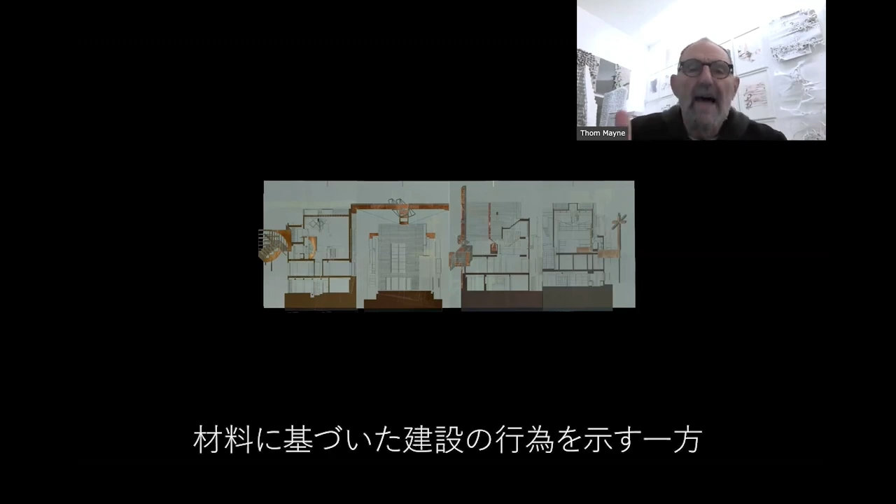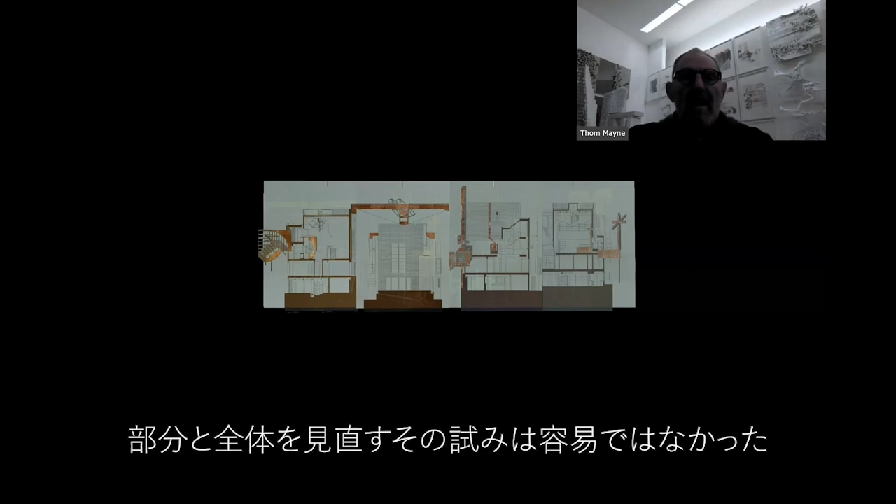They were searching for conceptual organizational ideas, connected to different notions of making, construction, material, etc., in different cases. With the six-foot drawings, you could say it was as much about the constructional act and alluding to material as it was about rethinking organizational ideas, which were challenging the whole notion of part-whole.

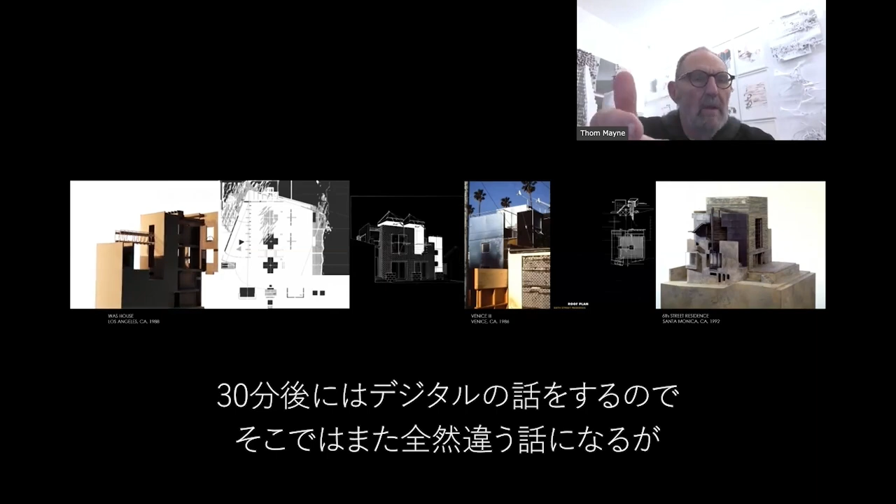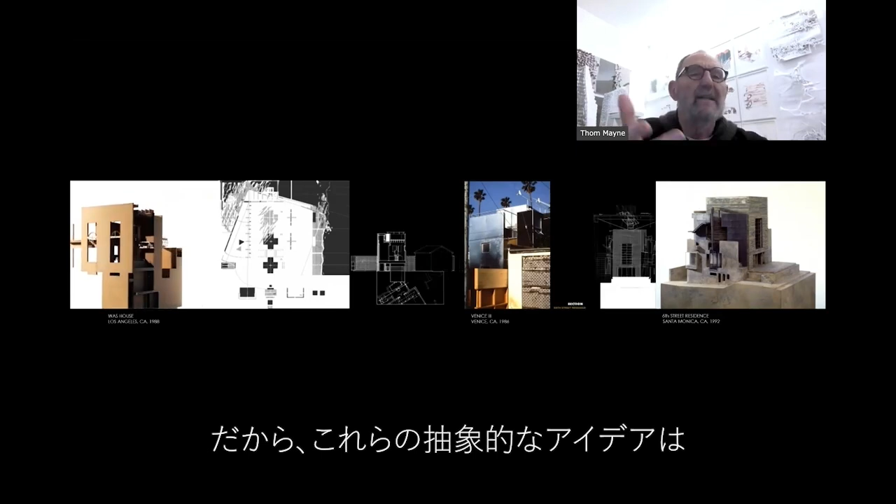These drawings immediately led to conceptual thinking, because in half an hour, when we talk about the digital, it's going to be a completely different conversation. They were done within the tradition of plan and section, so you are responsible for the connection of these abstract ideas—something that has to do with a vertical idea, and something to do with a horizontal plan. And of course, there was still the notion of plan as a generator, the drawings themselves as the generation of both the ideas and the documentation of something you're about to construct.

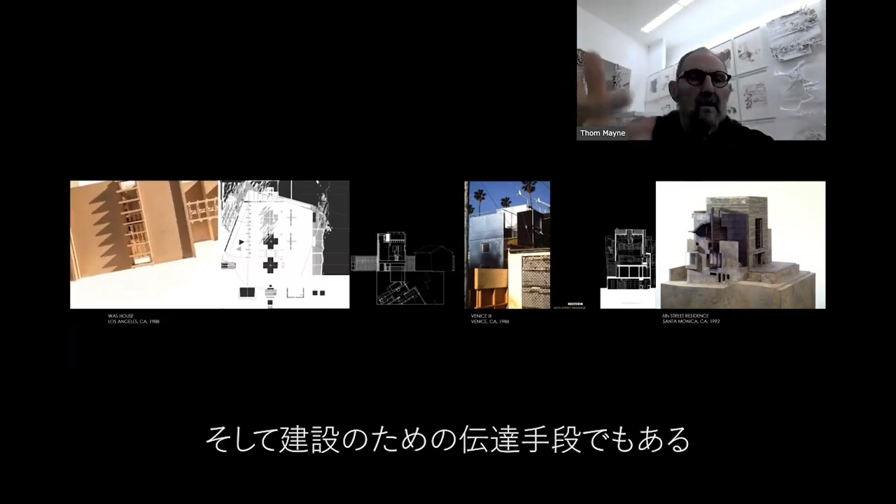Then I put this one little piece in here, the second drawing to the right, the computer showing up. This must be about 1990, and we're looking at a Mac 1, and I'm still looking for the human character within the computer and the eccentricity you can still find, because it was a bit too purely rigid, mathematically and geometrically, for the interest it was having.

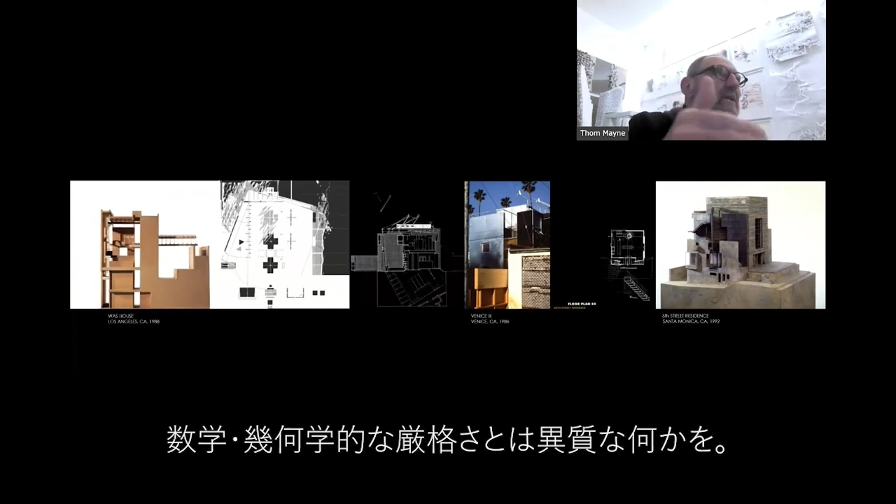Again, this is going to connect to your interests. Everything you're going to look at has to do with a series of fragments and partial elements that are making up a new construct of whole, because I'm interested in relationships, etc., and it's now finding its resolve in the work.

With this, we're looking at the conversation between the drawing as part of a thinking process and the work—there's this reciprocity back and forth. So the drawing is now affecting the building, the construction of the building is now affecting the nature of how you draw and how you use the drawings. There's going to be this continued interest in drawings that are now part model, part drawing—a conversation between the physical thing, the drawing, and its physical manifestation in an abstract sense.

It's going to get more and more rigorous. You're going to look at sections, and as we get to the digital world, it's going to be another notion—we're producing a couple dozen sections of a building, and we're extremely rigorous about the importance of the drawing as it develops into a complex, multi-dimensional kind of thing.

And again, the computer is going to start creeping in, and we're producing as the work gets larger in scale.

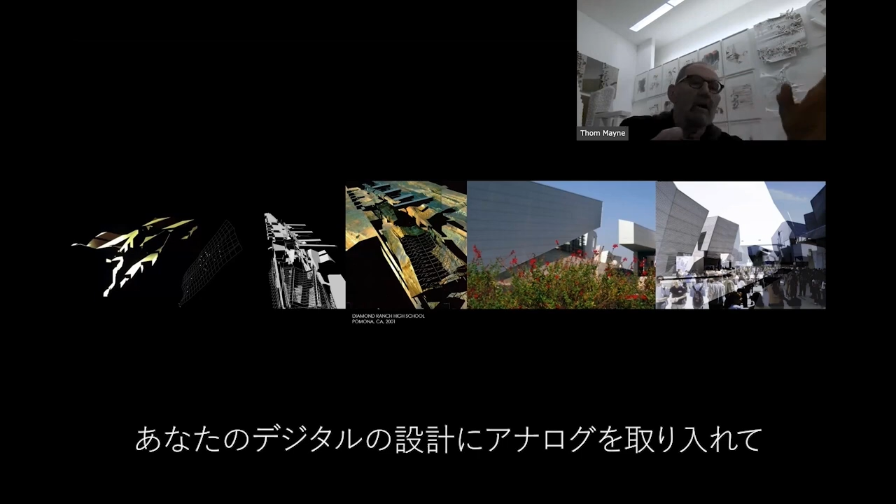That started with this classical method, so if this is useful to you, you're going to be looking also at the possibility of using analog, of looking at traditional methods as you look at your own work. It's going to be much more hybridized in terms of how you approach the work. Because what this is doing also is it forms you as you make drawings—you have to contain in your brain the synthesis that you put this thing together by connecting these abstract drawings of plan and section. It's a very, very different way of conceiving something.

Again, there's going to be this period in between where we're still drawing in conventional terms, and we're now starting to put these things together three-dimensionally with the advancement of complexity that the digital world brings. We're still drawing conventionally, making conventional sections, but they're actually produced digitally. And we haven't quite yet figured out how to make those—I'm going to talk about in a minute.

And the notion of interconnection of multiple systems that produce a piece of work—if you look at the complete left, we're now able to articulate multiple systems and start overlaying those, and now testing it through construction that takes back to the idea of how we're developing this.

What's happening with the digital world is we're able to move in a quicker way, and we're able to now connect multiple systems. We have a system that has an ability to operate in geometric, mathematical terms that allows us to produce something much more complex in terms of the relational aspect of the work. And then there's going to be a moment when there's a leap made, producing a piece of work for a competition, starting from a digital place.

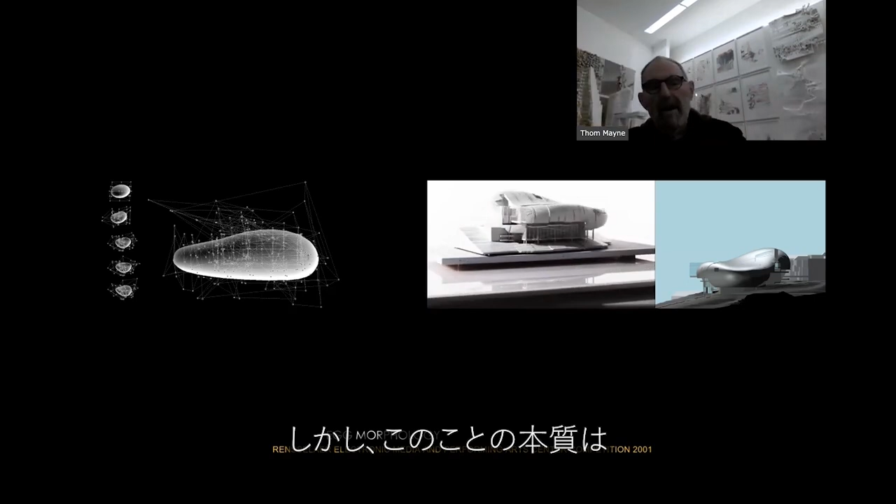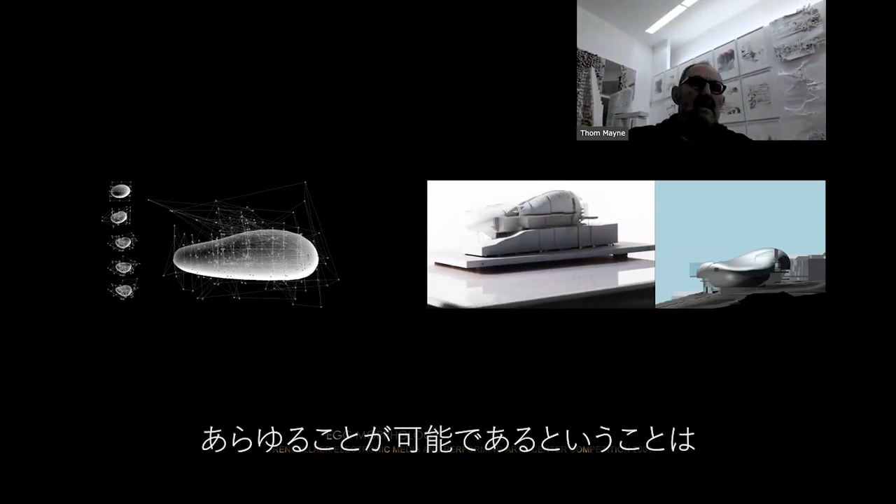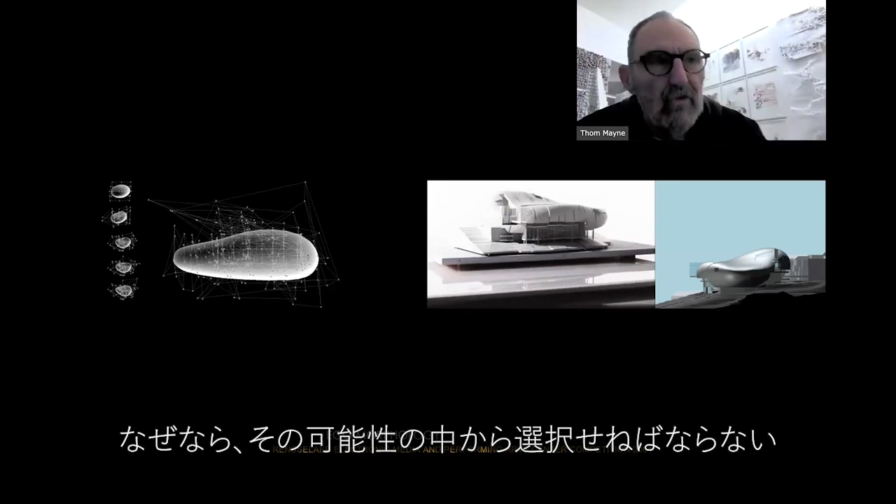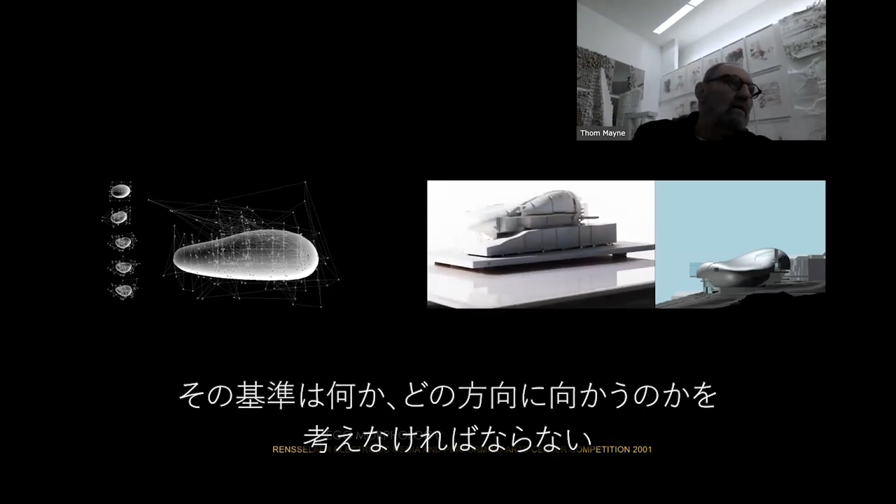But what it really did, and in my essence at this point in my life, I'm going to say it's both an opportunity and a problem. It opened up the possibility of form mapping that was more or less infinite. And that same notion of all things being possible in any artistic activity is also a problem, because now one has to make decisions about the nature of the meaning of that kind of gesture, and what the rules are that allow you to move in one direction or another.

And then there's going to be a kind of shift here, because I'm going to move into another territory, because there's going to be now a connection of construction and conceiving, and the thinking of a thing in conceptual terms, and its realization.

And we were doing this one little simple house, and we were not interested in the conventional drawing process. We put it together in terms of parts and a method of putting those parts together. And it ended up being a precursor to something absolutely essential, as this other world appears in front of us, and we're drawing by hand, of course, right?

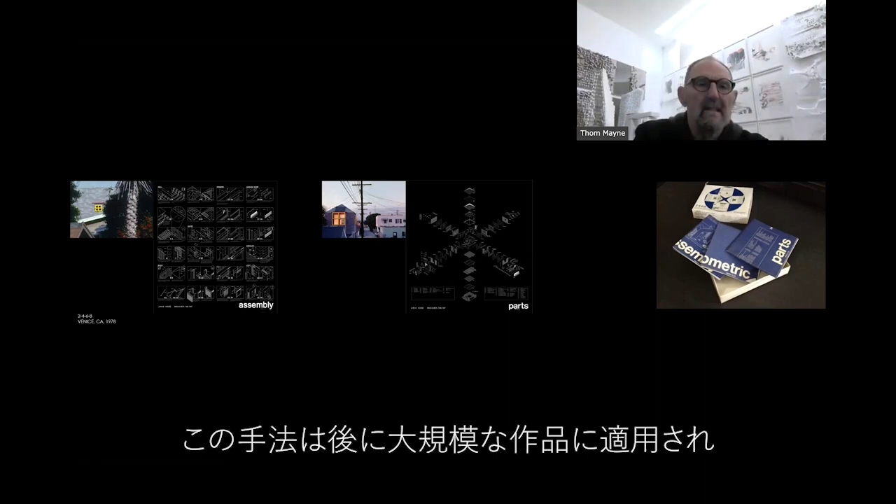And so again, these projects are getting larger, and now the drawing process, the documentation of this thing we're inventing, the digital is becoming more and more important. And again, it's collapsing the traditional notion of plan, section, elevation to make something complex, that's harder and harder to even understand within two-dimensional kind of thinking. And it requires the tools we work with to advance, to be compatible and in alignment with the types of projects we're doing.

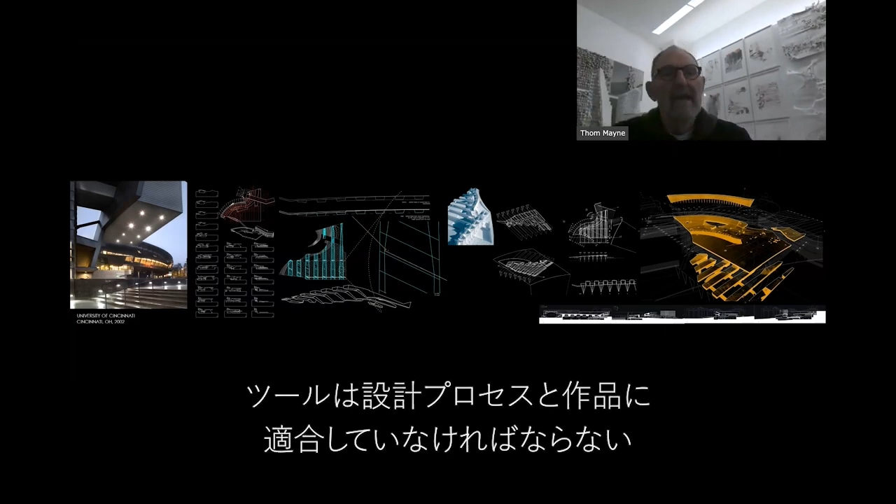And we're realizing we need to advance the technology of the discipline that allows us to advance the thinking and complexity of the tasks that are in front of us.

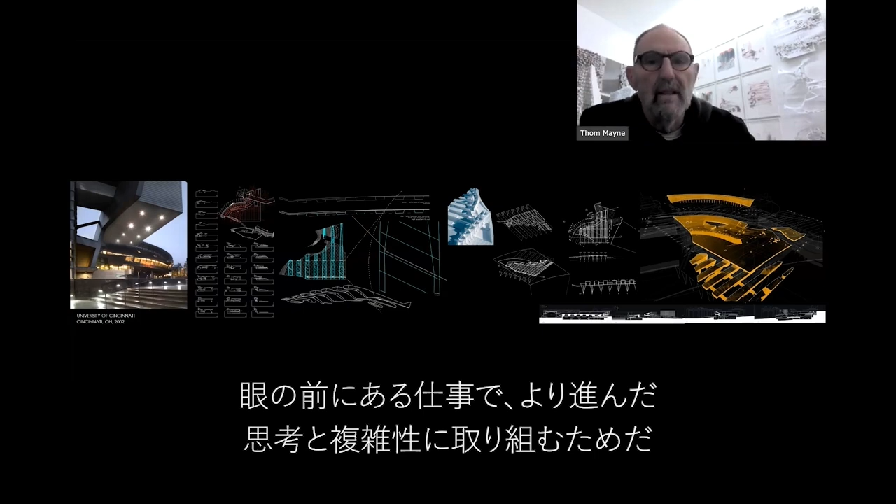And this now is going to become an absolute part of the studio. And what's going to take place is there's going to be a seamless connection, a continued flow of information and thinking from conception through construction. So this notion of designing is going to be very fluid as we move it into its translation, the articulation of materials and the shaping of materials and how they go together to produce a piece of work.

So Tori, I think I think this is you, am I correct?

Correct. Yeah. And I would think what's most interesting for young architects, it's now giving you incredibly extensive responsibilities of realizing your ideas and being able to look at multiple alternatives, and to really extend the whole notion of what you're doing as an architect.

So we're working at a particular facade, and the facade is about performance, for one thing. It removes heat from the building, and it operates environmentally in terms of making a responsible building in those terms. It's now understanding facade as surface, and that surface now opens up huge opportunities.

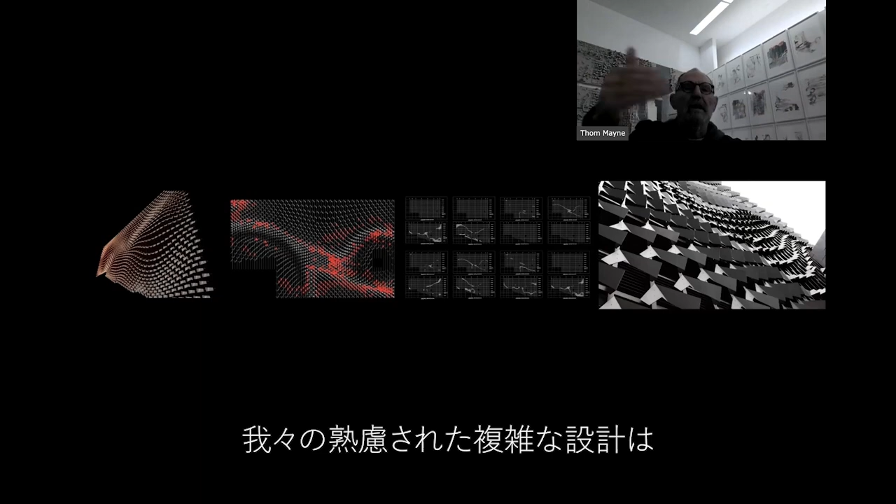And again, you might explain there, this could be a whole lecture, that we can now take a raw piece of aluminum and actually show you how to cut it to get 100% of the material and not throw anything away. And we did that for the contractor. We're now involved in a level of intelligence that goes beyond the constructional ability within a particular culture, and we're very much engaged with them, showing them how to do something in a more sophisticated way that gets us this, right?

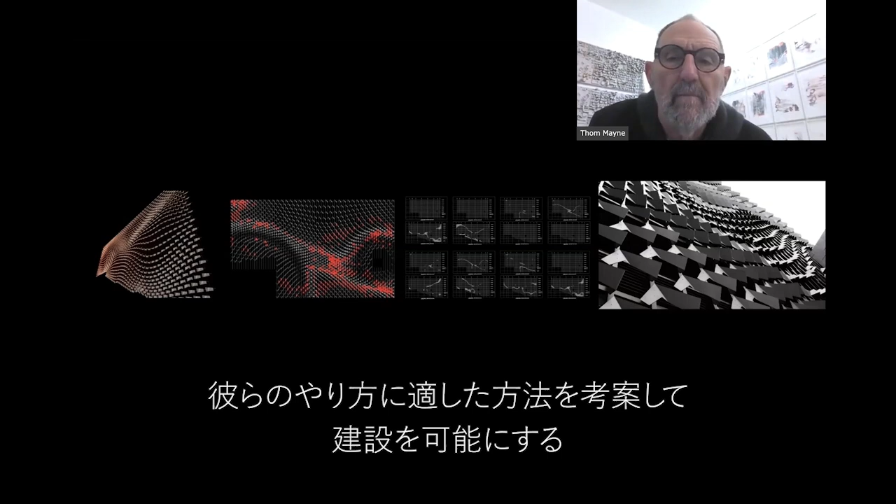I would think this is going to continue in architecture, expanding the role of the architect as we get more engaged in the intelligence of making things, and as we understand how it connects to our original design idea through construction, and with construction comes the method of delivery. It's a dynamic process of how this thing is made.

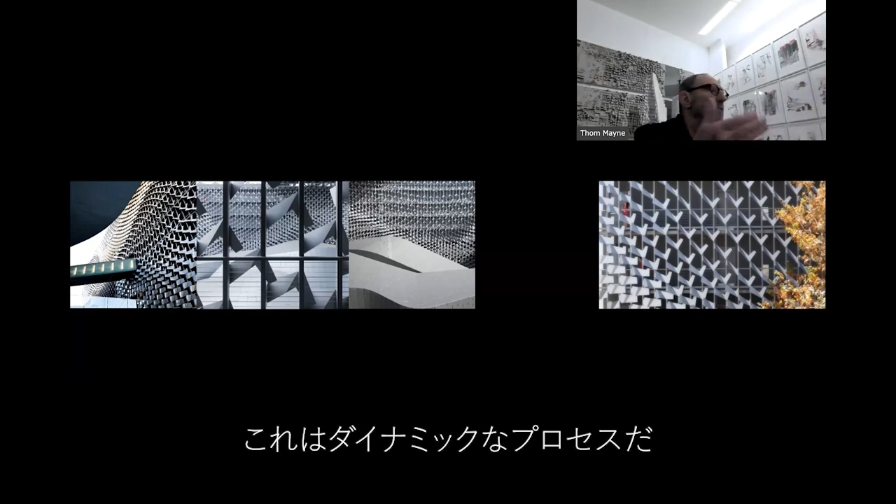This is going to start influencing and become institutionalized within the studio. In some ways you figure out how to translate this. It's a connection of a development of an office that starts as a very small, intimate office working on small projects, and it's going to move through the offices. We're now working on large institutional projects, and it still finds, let's say, the human hand or the human character that's still building these things. I'm extremely interested in that, as you know.

We're continually pushing an envelope. So now we're using GFRC, producing something at a different scale. We're in the shop, we're designing, it's a continuation of the process, and we're going to spend a year working with these people, producing something that operates. Again we have the jacket, the second skin, and we can talk about it now in pure environmental performance, as a design idea, or in terms of its constructional processes, the making process. It's all becoming more and more seamless.

And that same thing is now going to expand to the interior. We're going to make an interior facade. In this case we're using the product of the client—they research high-tech materials, and we're using the materials they make for the product of architecture, making this highly contextual. And we're using the same kind of thinking that allows us—what is it now?

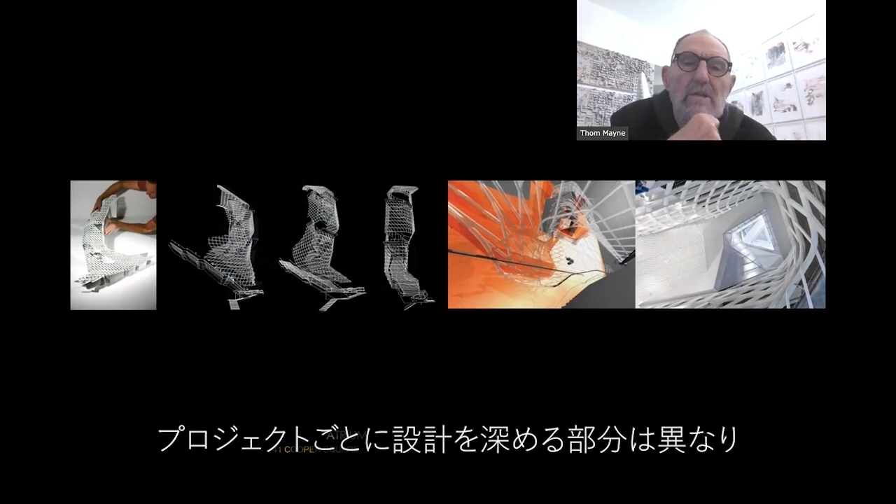This is going to take place in all kinds of unique conditions. A huge amount of the work is going to have certain areas of intensification—it's not all designed at the same level of intensity. In this case, the main space for Cooper Union.

We now have tools that we can produce things we can't even draw, which necessitates the digital tools, and the relationship between us biologically and us as cyborg and digital are coming together, and we're using our own decision-making processes. We have tools now for things we couldn't produce under the old system.

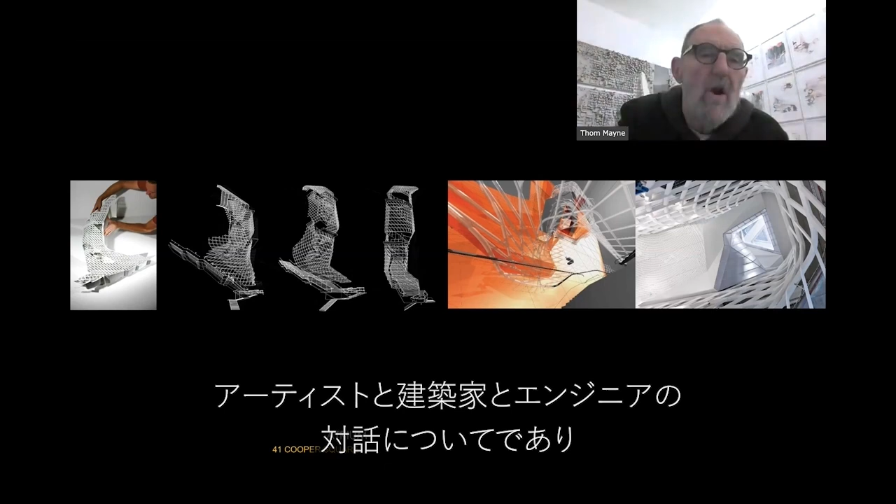Many of you maybe start with this, but the conversation of this would be its relationship to the broader thinking of the building—it's about connective tissue, about a vertical piazza, about advancing conversation between artists, architects and engineers, which is the basis of the school, and its basis is social. So we're looking at it—the complete right is a vertical social space, and we wanted that to be the memorable notion of the image of Cooper Union as a school. There's a direct connection between the aesthetic, the technological, and the broader cultural purpose—they have to be in alignment.

And then this becomes ubiquitous—they're developing a thinking of a public space of a museum, and we're able to think about it in very different terms.

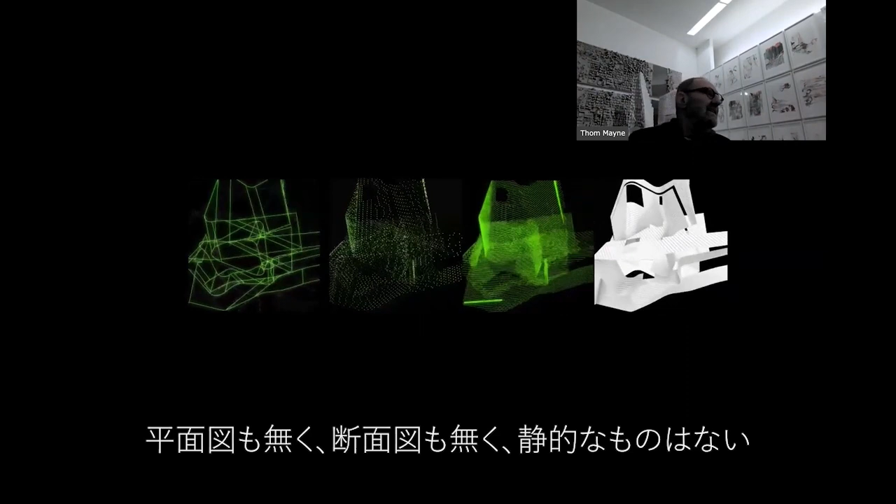If you go back to the beginning of the talk, at the drawings, you could say we've just about shifted professions, that we're approaching things in such a different way—no plan, no section, no static. We're looking at it dynamically. We're going to understand, we're going to move through it dynamically.

I'm just showing you this—it's a little quick lecture, these are just little pieces. Each one of these we could stop and have a 20, 30-minute conversation, no question. And that same thing we can move through. I remember going back at the beginning, we were discussing you can crawl in the thing and move through it, and you have some understanding, right on the left, of the nature of this thing related to the human character and how it operates as a building.

And it's dynamic, right? Then it's translating into a model still, and the model still allows us to understand in a very simple way the outcome of our ideas prior to construction. But they in themselves are now made with technology that we can't make really by hand, and they are seen in dynamic terms.

That gets us this. Again, most of these projects have to do with certain areas of intensification, which aligns with the public nature of the building. It'd be the more intense cores that are the most intense part of an architecture.

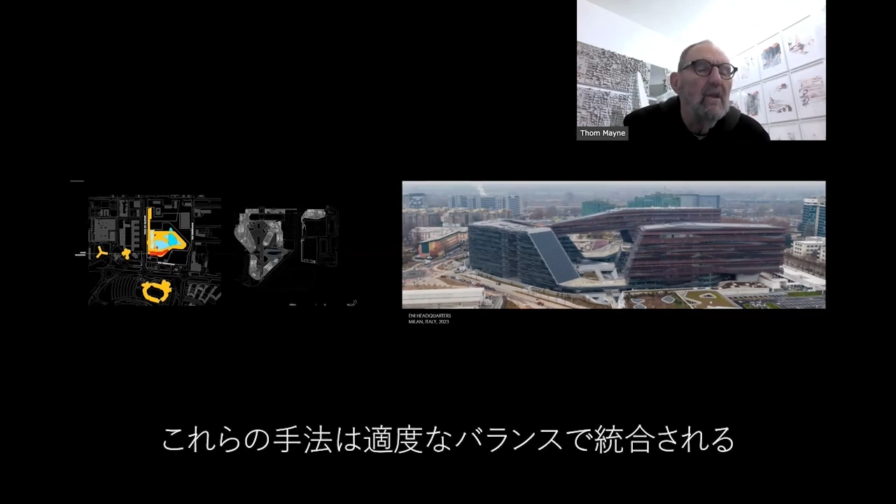As the work gets larger and becomes more about city making, all of these techniques come into balance. We go back and forth, and there's still notions of plan. But it's very clear now why we're drawing plan and the usefulness of that particular drawing—it's no longer the generator of the thing, as you're going to see here.

This was the Eni headquarters in Milan, an oil conglomerate, and we had an idea of the stratification of geography and the notion of oil as the organic layer. We documented that as the skin of the organizational idea of the building.

It comes out of a set of abstract drawings from the digital world, layers of earth moving here. The conceptual drawings are now thought about in three-dimensional terms, within a gestalt, a totality of something, and not pieces.

The section and the plan are long gone in terms of those ideas, except when we're looking at them for particular reasons—understanding a plan in simple terms of furniture layout or the distribution of functions, etc.

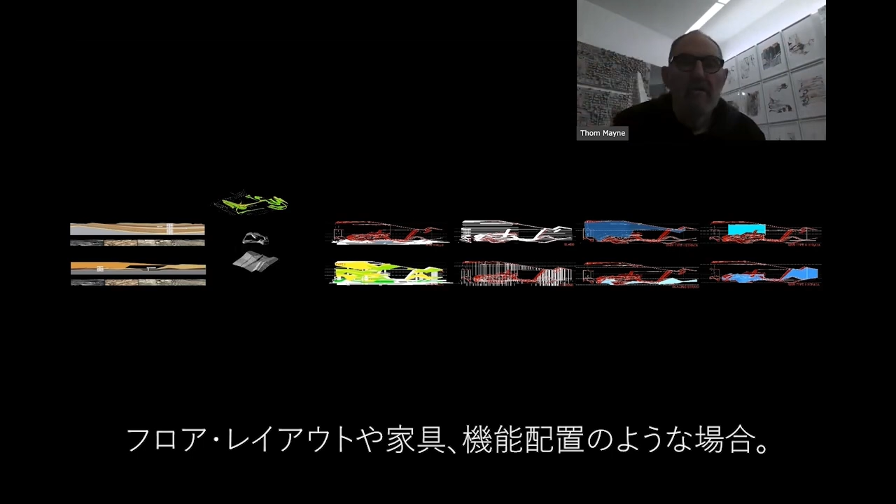And it takes us here. Again, if you went back to the constructional drawings, that same thing leads us to the notion of building. And on the far right, what I'm interested in is that it still exhibits notions of very handmade things.

The same tool allows us a seamless connection that breaks the differences between concept and construction. It allows us to move from macro to micro—we can operate at a macro level of the urban scheme, and move to the very specific level of something like facade design, which has to do with environmental performance.

Then, of course, the scale becomes enormous. As the projects increase in scale, all the conversations I'm having get ramped up in terms of the necessity of the types of tools we're using, which are commensurate with the kind of work we're doing, because we're now building fragments of cities.

And now there's going to be a shift again. Satoru, I did this purposely—maybe you'll ad-lib some of the conversation in terms of the growth of the interest I have in architecture. Just like I started with sketches and drawings, I stopped 7 years ago and started working on organizational ideas.

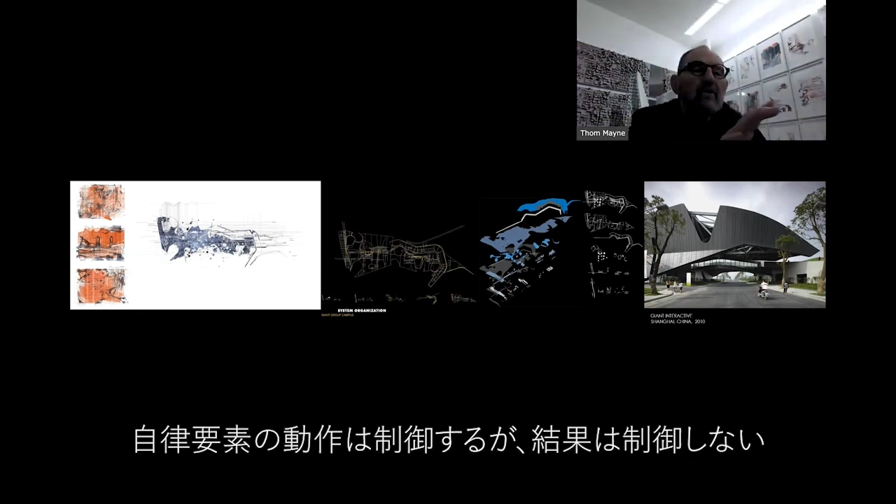And then I can quickly turn that into something that's more plan-like, that deals with the various demands we have in functional terms. And then I can layer that and discuss it systematically in 3 dimensions and start discussing how to make it and produce something that's parallel to the drawings I just showed, where you're controlling the operational strategy, but you're not in control of the final thing.

It's a response of that operational strategy, and you're making choices to do that. And it's expanding my creative life to do things that are beyond my own capacity if I'm depending on a priori ideas. And then again, what's going to take place is going to be a synthesis of everything we've talked about: the conception, the responsibility for how to make it, the structure.

And then you look at the building, and again, we're getting this incredibly important feedback mechanism. We're looking at something that does have the complexity where there's over 12,000 individual pieces, none of them being the same. And it's absolutely doable, and it's absolutely part of the construction industry, but we're taking responsibility for it, and it comes out of our studio as we're working with these people, as we make this.

And now this is going to be another feedback loop. It's going to come right back to us and give us information in terms of its usefulness, in terms of our future work. And then again, as architects, we take responsibility for multiple agendas.

And so we can talk about the building from the very beginning in ecological terms, and tell you that a majority of its landscape, we could talk about it within sustainable terms, et cetera, as a model for an urban model which integrates landscape and building. And of course, today, the broader conversation is landscape is man-made. So we're just looking at 2 human-made structures, one that has the tradition of typology and archaeology, and the other which is more morphological, and both of them are programmatic.

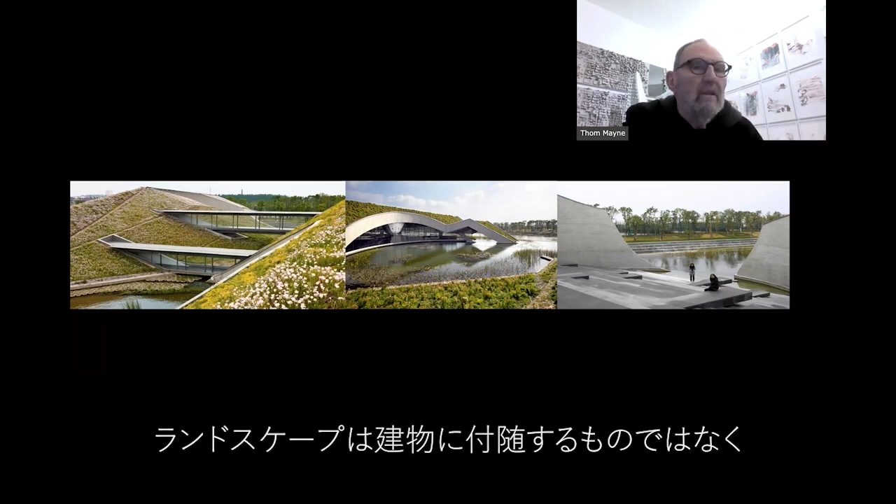And now we're looking for, it's taking us to a place where we're looking for a different notion of differentiation that might be closer to landscape than it is traditional building. And the building is now somewhat subservient to the demands of an idea of landscape versus the other way around. Landscape is no longer servicing the building, and it's that edge. Landscape is the idea, and building is just about secondary, or the 2 are merging where you can't even separate them, might be even the clearer notion.

And being able to walk through it in the computer model, you can understand this through the occupation of the building. And as you move from one end of the campus to the other, it's about 1 kilometer long. You're always engaged in inside, outside, and you're always engaged in the diversity of the conditions that have to do with this urban condition and this land condition, et cetera. And all of it comes out of that original drawing I showed you, that was leading us to this organizational idea.

And at times it's open. It's infrastructural, and it follows a lot of the rules of nature, and it's still open for interpretation and for use. Okay, step 2 of this new process.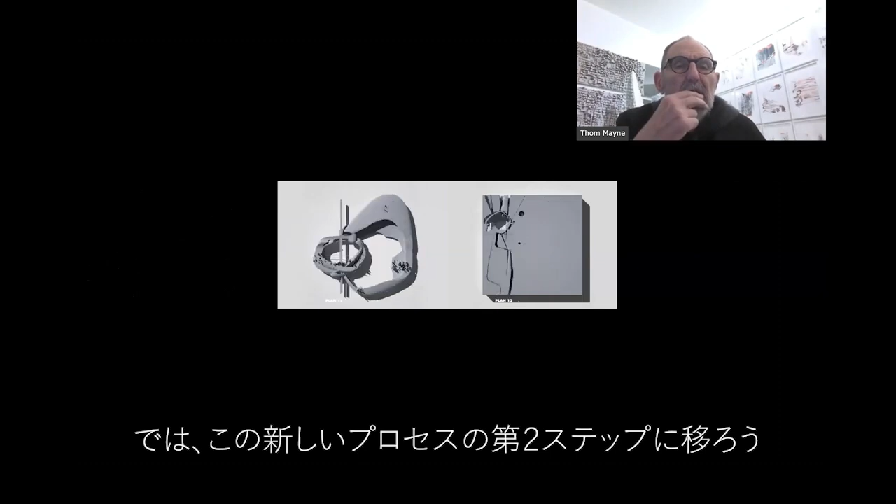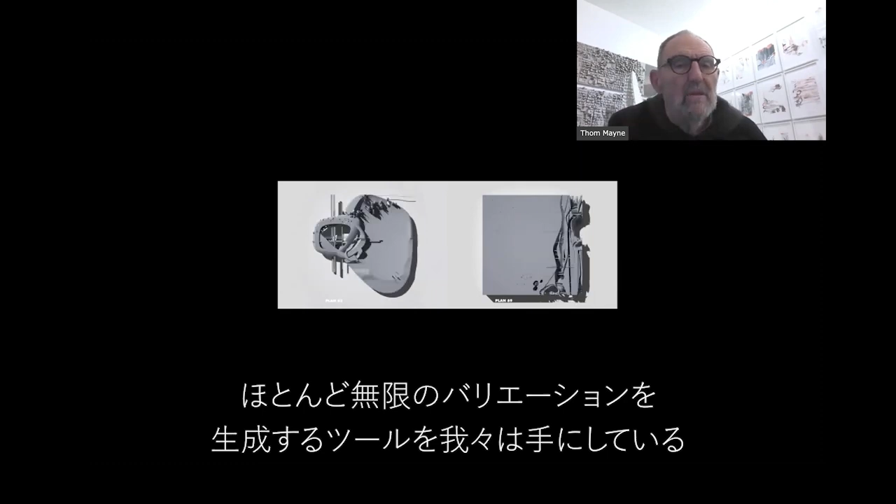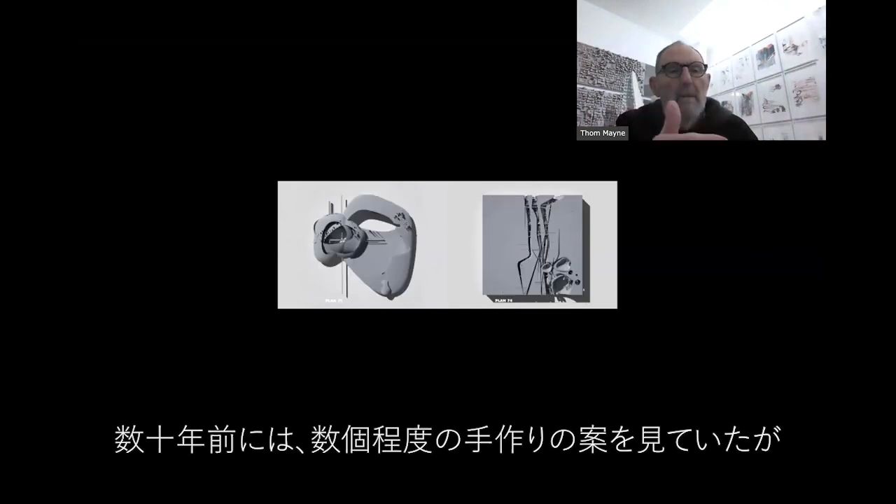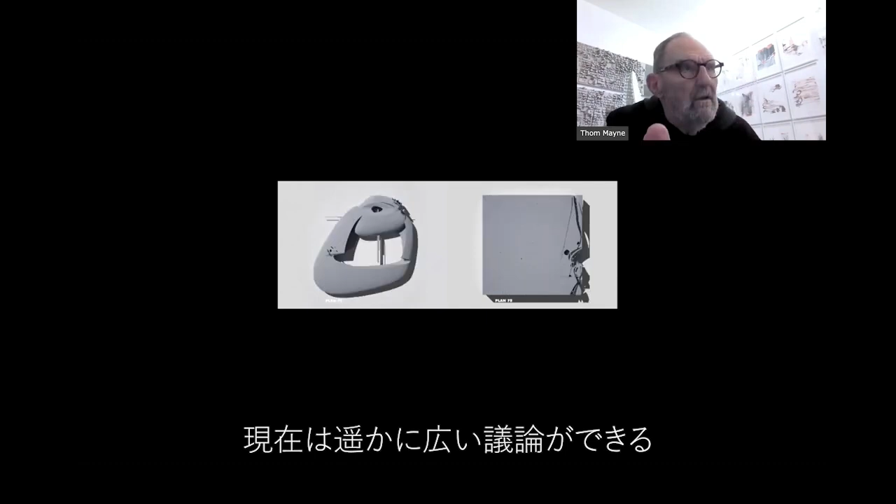We can look at different conceptual organizational ideas, but we can now look at them in more or less infinite terms. So each of these ideas I can see in dynamic terms. You're looking at 100 here. Again, go back a couple decades, and I'm looking at options, 2 or 3 or 4, and they've been handmade. And now this is allowing a broader conversation. We can discuss these in multiple terms, in terms of where they're taking us as organizational ideas. And it's going to take us again to another direction.

So I can look at one of these abstract things, and you can look at a plan. This is a competition we won in Beijing for a park.

But I was able to look at multiple options that took me to its usefulness in the development of a park, and something that's directly coming in as a critique of the last project you saw, as we're looking for a language which is integrating traditionally man-made architecture and landscape, and the two are becoming singular as an idea.

And at the same time, of course, the park is changing, and it's no longer linked to the Arcadian notion and the kind of passivity of landscape, but it's a highly activated park, and it's cultural. It's a park that represents cultural activities. So it includes library and theater and music hall and tennis courts and soccer stadium, et cetera. And it connects to the

contemporary condition. And again, in another park project with a set of pavilions, using that language that allows us to look very quickly at kind of options of producing a language that has some sort of a coherency.

And then again, all of this is connected to a working method from the very beginning, which was reiterative. We look at something, challenge it, critique it, revise it, and start that process, until we've exhausted the conversation. So literally every project you've seen coming out of this office goes through this process.

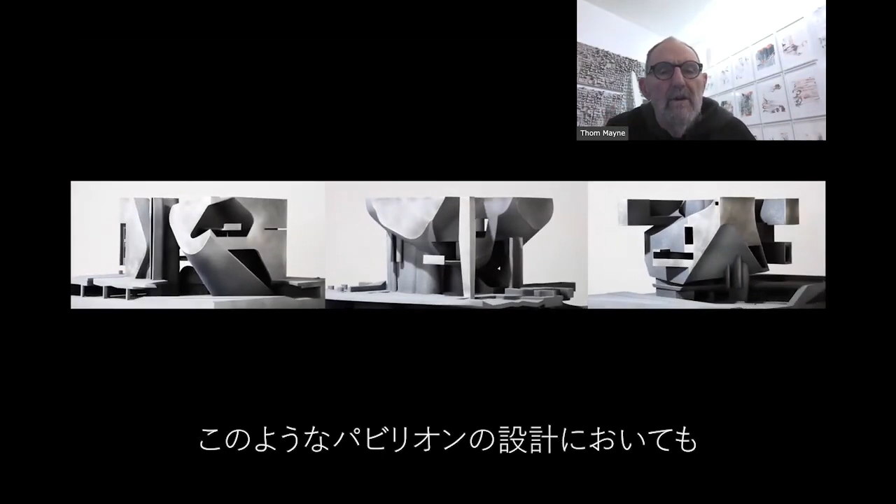And develop a language of a series of pavilions which define the language, but we can produce multiple variations of that language, right? And it's something that could be, again, another separate discipline. Like complex music, it has to have a discipline that allows us to even claim that these are organized, right?

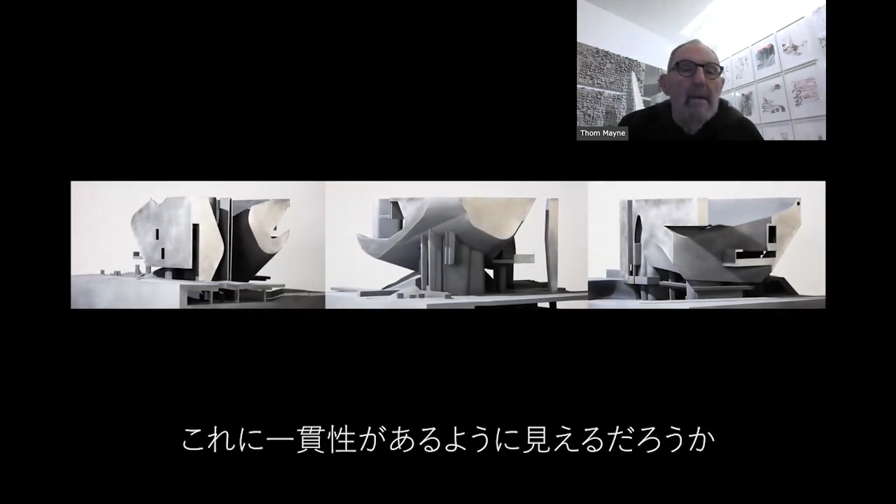And then we're looking for methods of organization where the conversation would be, what I'd ask you as an audience is, is there an agreement that these are coherent, that they are organized, they're not random, they're not arbitrary, right?

And then once in a while, we even draw stuff normal, but you can draw it as I purposely not shown that stuff. You can show it as a kind of a rendering, what it looks like. Again, Satora, you know me, that's a kind of a separate conversation. I'm much more interested in exploring something, and I'm more curious of finding something I can't conceive, and I'd rather see it when it's built.

So as an architect, I'm not interested in looking at it to begin with, because that means it's over with and it's dead. I need a new project. And now, right? And I don't know how you translate that, but it doesn't matter.

Again, you have a tool because it's three-dimensional. You can look at it any way you prefer to look at it. Or you can decide that the client wants to see this, that they're interested in something that's more literal or something. But it definitely discusses a conversation of how we show things, the terms we use in terms of what models, drawings, things that you can't quite name, etc., kind of what those tools are and how they're useful to us in terms of our own creative process.

And then I'm going to end with a project that would start another conversation, as the projects become clearly urban, a technological component of a city in China, we're now at a place where I'm going to claim that our role is to find more complex systems of organization that are in line with the complexity of the problem, and that at this moment of time, architects and urban designers are somewhat limited still by the simplicity of our thinking organizationally, and that the most compelling projects of this century will be dealing with the reality of the complexity of the projects in front of us.

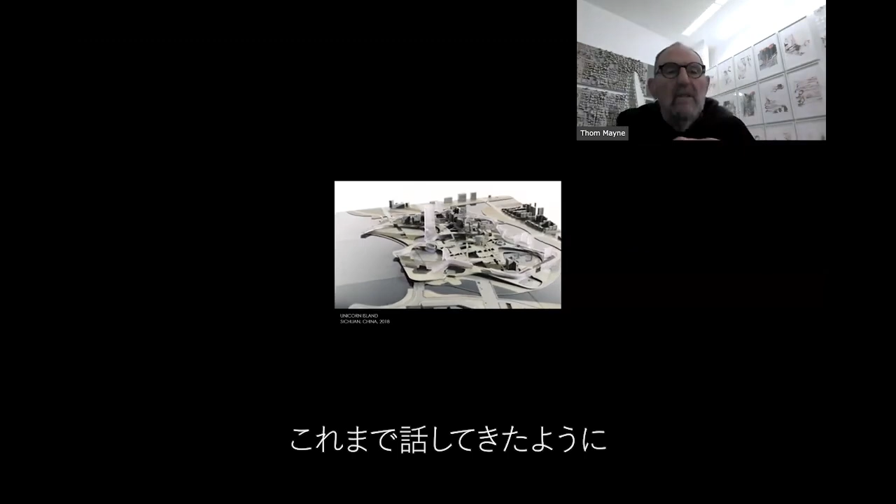And if there's any kind of connective tissue of everything I've talked about in terms of the usefulness of the digital world as it augments our world, or whatever the convention is of our world architecturally, this is where it's absolutely going to be an obligation. Sitaro, thanks so much.

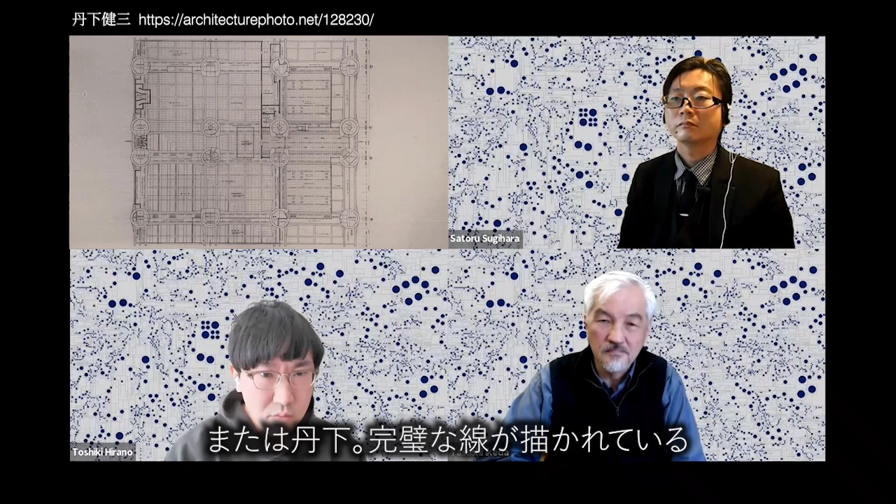We could also show you these lines - people you maybe don't know, but you could go in the old days to a Seligman or a Mathias Ungers who were really disciplined about the line, a Tange, where a line had to be perfect. I was drawing - I can see a drawing, there is no not perfect line. They're all absolutely, and we can tune them within parts of millimeters and make them even more perfect, whatever you want design perfect to be. And it's an adjustment on my computer, it's a dial, you're changing a dial.

And everything we're talking about is going to have huge influence. If you're under 25, to me - Satoru, you're the guy I know - you would want to have some serious conversations about what architecture's even going to look like, even a decade from now. We didn't even touch AI, and it's just 3 years old, literally a couple of years old.

And it's already just moving at the speed of light. And it's a long ways from architecture, I think. That's another conversation, but it's not that long—it can do certain tasks, right? And again, you just have to wait and see.

And I'm an optimist, so I'm going to say it's good news that out of it will come huge opportunities, right? And it expands our ability as thinkers and as artists—artists in a subjective sense. And that's another thing we didn't hit on, is subjectivity. Some of the drawings I'm showing, I'm looking for the subjective. It's not something we can agree on. It's private to some degree. That does belong to me, right?

Yeah. Oh, can I ask one last question? I think you touch on a really interesting topic with subjectivity. Do you think the subjectivity comes from your inner obsession, really deep down in the unconsciousness? And do you think this decision-making process, this subjectivity, can be replaced by AI? So even like selecting several paintings from hundreds or thousands, could AI do that for you—something like an AI that chooses a painting for you, and then you agree on that? Do you think that will happen? Not. No, no. I think it's kind of a fear.